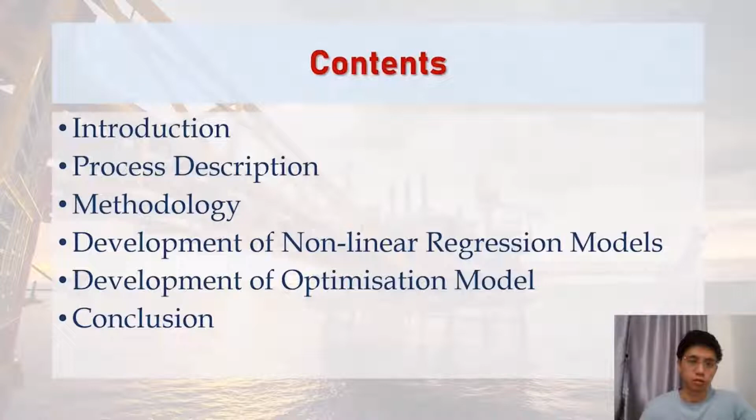In this presentation, I will cover the introduction, process description, methodology, development of non-linear regression models, development of optimization model, before the work is concluded.

The natural gas treatment process is to produce pipeline quality gas specifications. There is a series of natural gas processing steps which are required for treating raw gas. It begins with inlet separation, acid gas removal, gas dehydration, hydrocarbon dew point controlling, nitrogen rejection, helium recovery, and ends with gas compression before being transmitted and distributed to the natural gas grid.

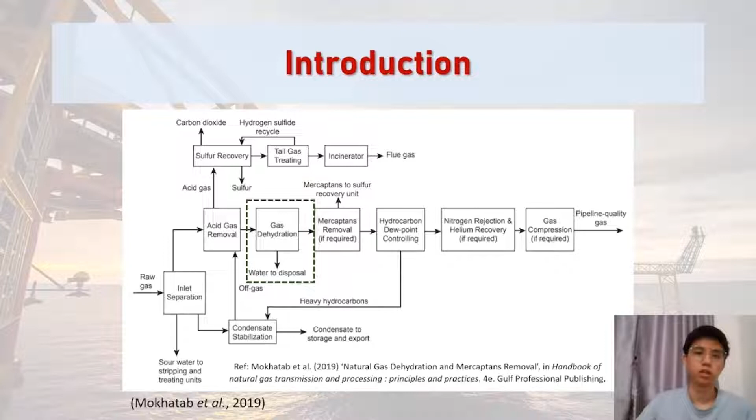We will be studying the glycol dehydration system in the natural gas processing facility. In this work, we will be focusing on the simulation and optimization techniques and the method to conduct regression analysis that could not only be used in natural gas dehydration processes but also be applied in any offshore and onshore platform processes.

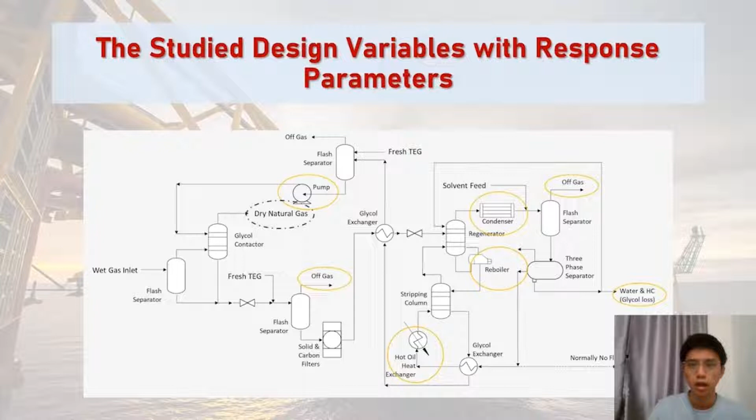There will be three operating parameters: the overhead reboiler temperature of the regenerator, the flow ratio of the water-rich stream, and the stripping hydrocarbon solvent flow rate. The studied responses are the reboiler duty, hot oil duty, condenser duty, pump duty, TEG loss, CO2 emission flow, and water content in the dry natural gas.

First of all, wet natural gas is fed into the glycol contactor from the bottom and lean glycol from the top. The lean glycol is a liquid dehydrating agent to absorb water from the wet natural gas. The top product is the dry natural gas, whereas the bottom is the TEG rich in water. In the glycol contactor, the pressure and temperature is set to 70 bar gauge and 30 degrees Celsius to enhance the absorption efficiency of water.

The rich glycol is then depressurized to atmospheric pressure and heated so that water along with hydrocarbons can be evaporated to the overhead of the regenerator column.

First, we will begin talking about the overhead flow before explaining the bottom of the regenerator. Stripping hydrocarbon solvent is added with the overhead product and is fed to a separator, where light components will be liberated from the system.

Since hydrocarbon is immiscible in water, they are fed to a three-phase separator. The water-rich stream will either be recycled back to the regenerator or removed from the system.

Most of the glycol will be lost to this outlet stream along with water. Going back to the three-phase separator, the hydrocarbon-rich stream will pass to the hot oil duty to be vaporized and is later fed to a stripping column.

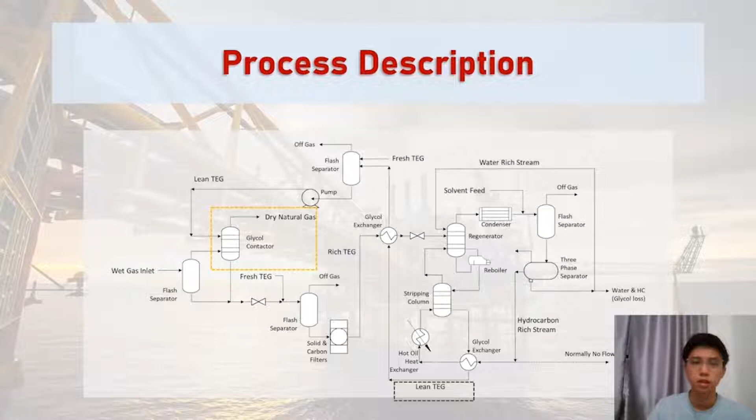Firstly, we will develop a base case simulation model using Aspen HYSYS. The design is based on operating parameters and specifications of the studied plant. We will use the sensitivity-based case study function from HYSYS.

HYSYS's built-in optimizer is not recommended because it only applies gradient-based algorithms, which requires convex models to generate the local optimal values. After obtaining the data, we export it to an Excel spreadsheet to develop surface plots and contour plots to study the effect of the independent variables on the responses.

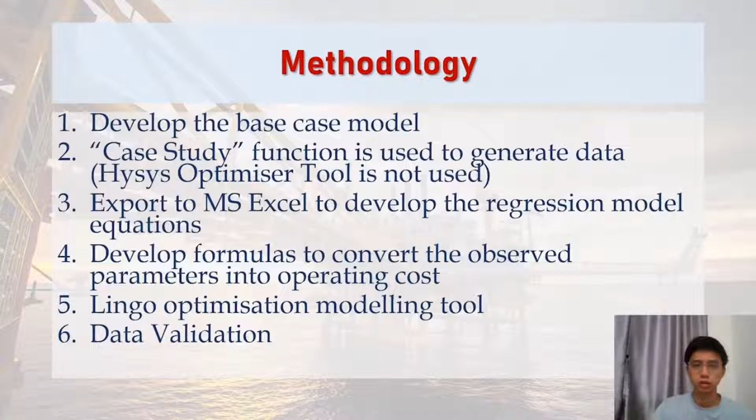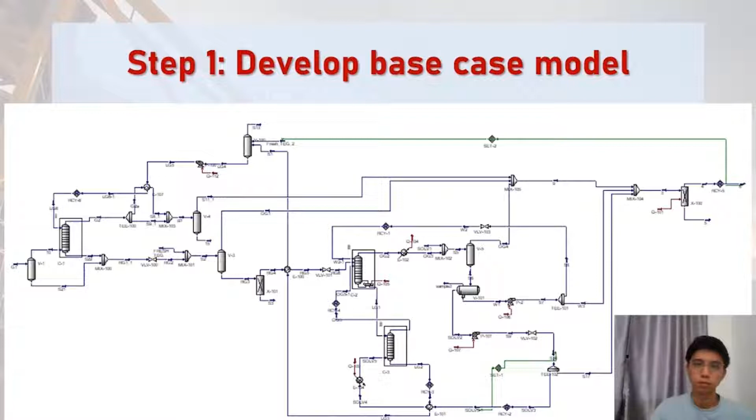Here is the simulation model developed based on the process flow diagram provided by the industrial supervisor. The base case values must be comparable to the plant data before proceeding to the next step.

Next, we will move on to the case study using HYSYS. Based on the results produced by the case study, we can develop surface plots for each response.

For example, we can see that when the reboiler temperature and solvent flow rate increase, the reboiler duty shown in the upper left screen decreases, whereas hot oil, condenser, and pump duty increase substantially.

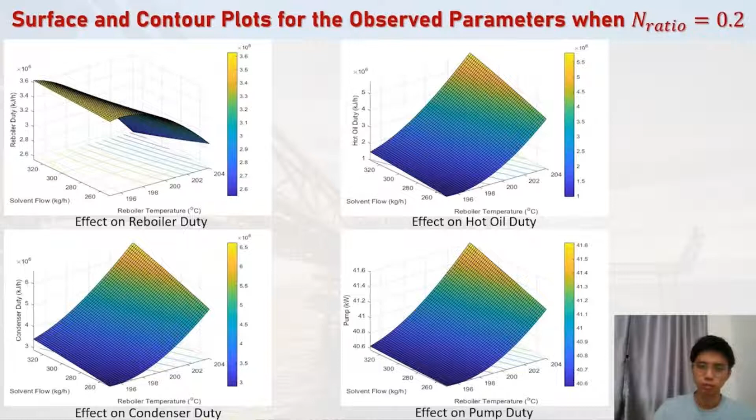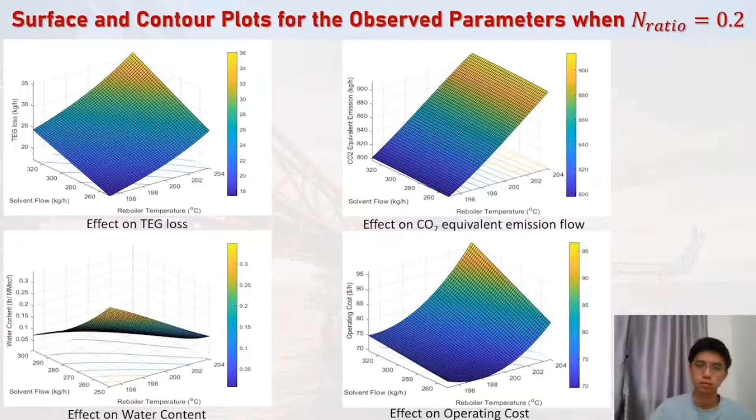Next, the regression model equations for each response will be developed. The responses are a function of reboiler temperature, flow ratio, and solvent flow rate.

The responses are applied in the regression model equations, which is QR, the reboiler duty, and subsequently the hot oil duty, pump duty, triethylene glycol makeup flow, carbon emission flow rate, and water content in the sales gas.

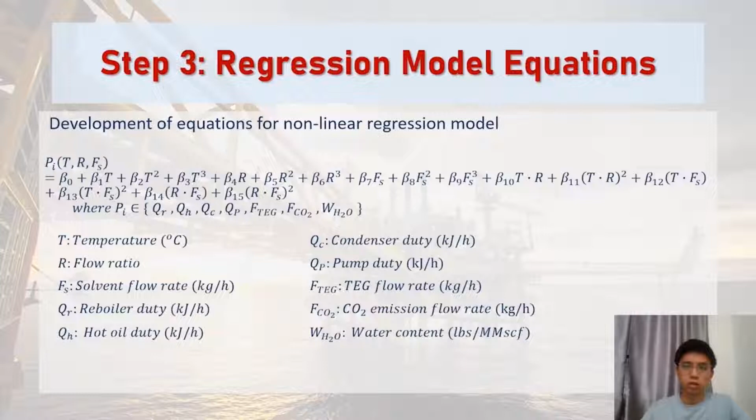I will demonstrate the method to develop a non-linear regression model using Excel. The list of data was extracted from the HYSYS case study table. Even though Excel has a regression add-on function, it is only applicable to linear regression. So I manually powered the input variables and studied the interactive effects between input variables to develop the non-linear regression model using Excel.

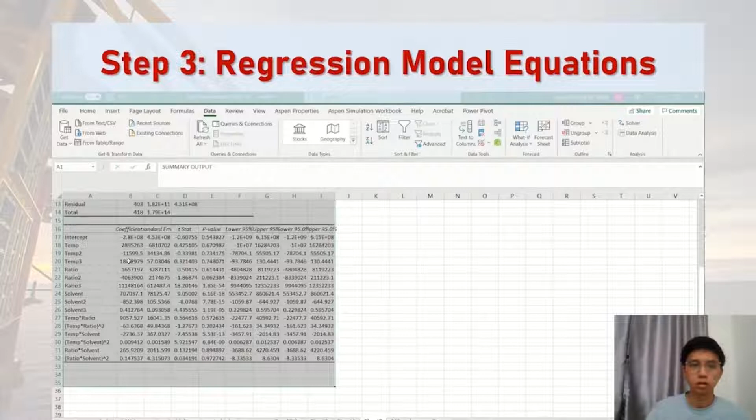Excel was able to conveniently show many statistical data as well as the coefficient constants for us to study each of the input variables. So I was able to get the equations that represent each response variable.

Using the add-on function provided by Excel, we are able to devise the nonlinear regression model. For example, we can find the coefficient constants for each term in the condenser duty.

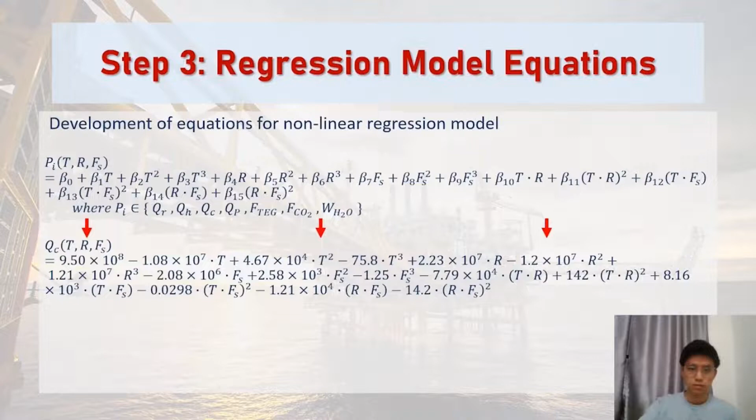Finally, Lingo programming language is used to develop the optimization model to minimize the operating cost of the plant. The nonlinear equations will also be included in the optimization model.

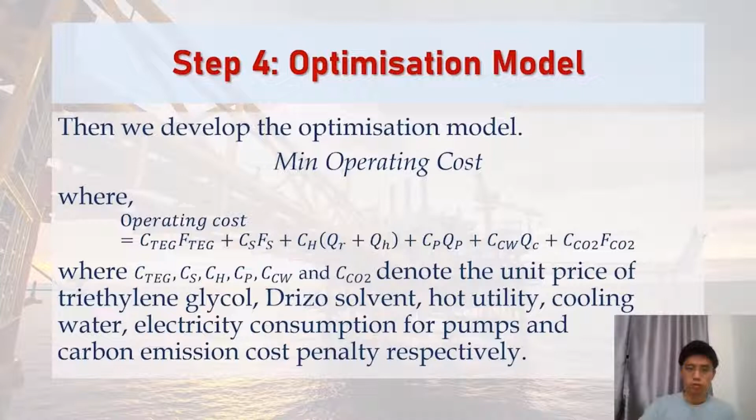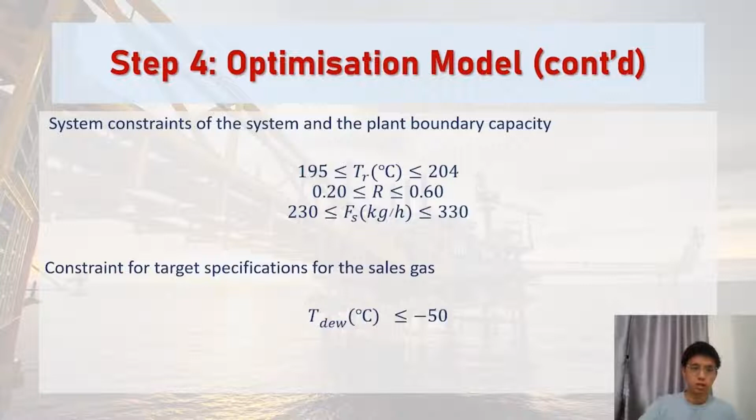The last step of the work is data validation. It will be done by comparing values generated from both the HYSYS simulation model and the Lingo optimization model.

Based on the summary of validation for the response parameters, all nonlinear regression equations were obtained with a low error of less than 1%. However, there is a 2.15% error in the pump power.

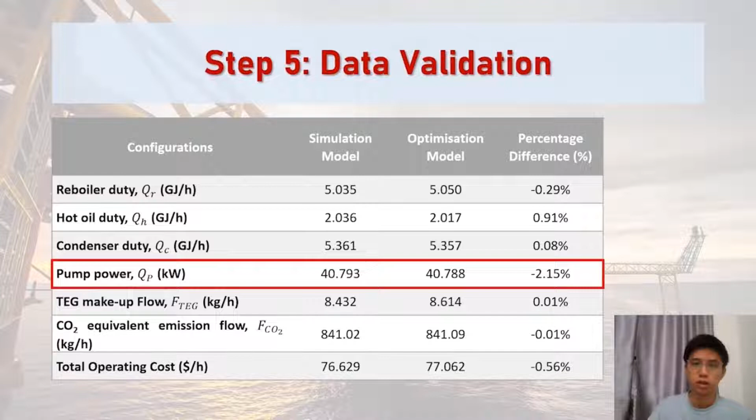This is due to sensitivity issues caused by a high number of recycle loops in the Aspen HYSYS simulation model. Hence, the accuracy of the simulation model has to be traded off so that the model can be converged.

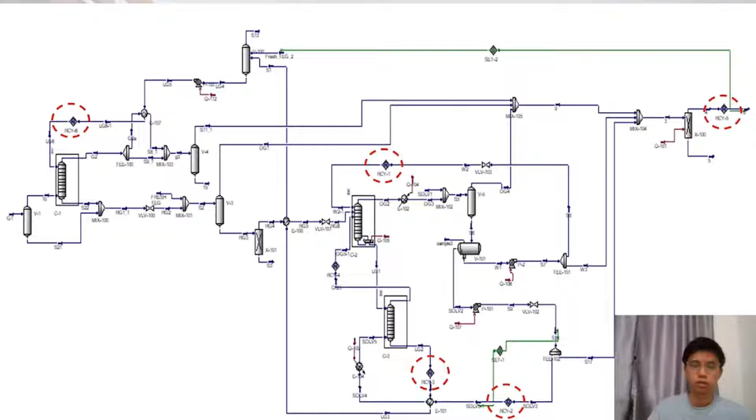Looking at the base case model and the optimized model, the final results show that the operating cost of the TEG makeup flow had decreased substantially, whereas other responses such as utility costs involving reboiler duty, hot oil exchanger, condenser duty, and pump duty have minor changes from the base case.

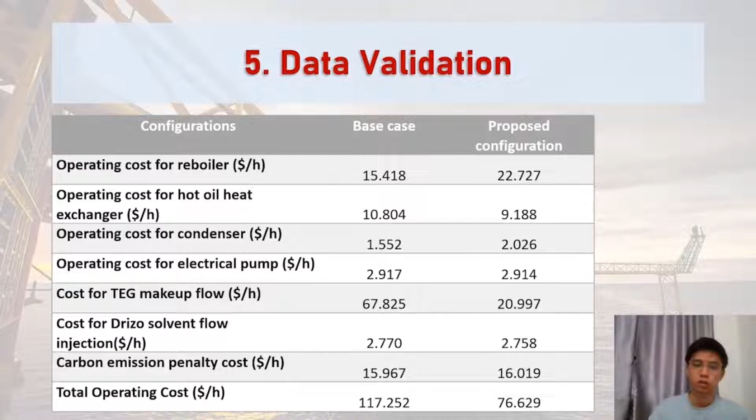The optimized configuration has reduced the hourly operating cost by $40.62, down to $76.63. In conclusion, the nonlinear regression analysis generated R-squared values of more than 99% for each response parameter.

The integrated simulation and optimization approach was fairly accurate with a maximum error of 2.15%. Process evaluation and optimization performed was able to minimize the operating cost of the base case by 34.6%.

From $938,000 to $613,000. Before I end my presentation, I would like to emphasize that the simulation and optimization approach cannot only be used in the dehydration process, as it can be applied in any chemical engineering related production industry, giving good predictive optimum values without any actual run of the plant.

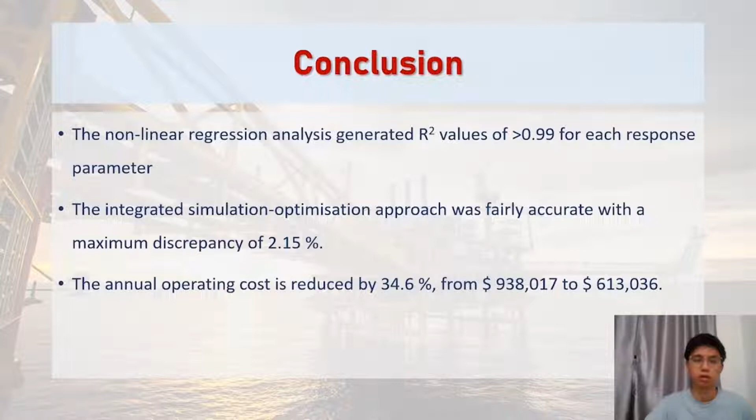Finally, I hope you will be interested in my presentation topic. Thank you.

Okay, thank you, Daniel, for the great presentation. Very technical indeed with all the formulas and calculations. I barely remember my days as a chemical engineering student in those days in my life. So thank you for that.